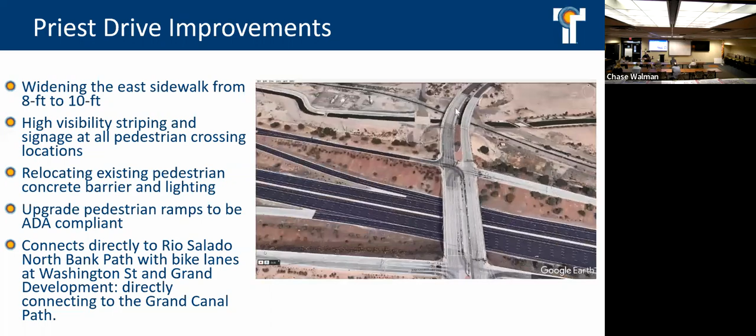On the east, where the current east sidewalk is, we're proposing to widen that to 10 feet along the whole east side of Priest Drive, and that would continue all the way to Washington Street, which we're approaching here.

We would do so by relocating the Jersey barrier along the Priest Drive Bridge, and then narrowing some of the travel lanes along Priest Drive. We're also proposing ADA improvements for directional ramps, as well as high visibility crosswalks along those crossings of the 202 that have to be made.

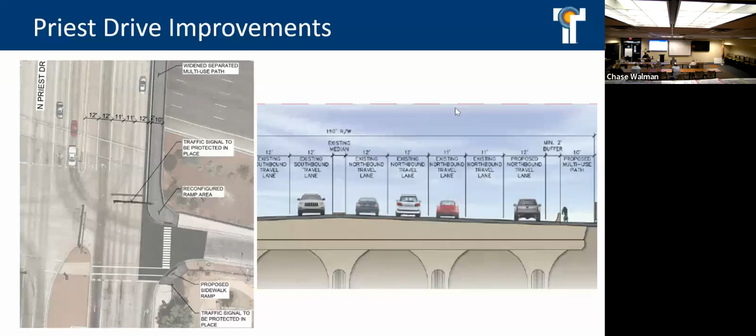Like a concrete barrier separating them. Yeah, I think it'll come up probably a little bit better in these photos. That thing, yeah. So this is the existing conditions here.

This is a rendering of what that would look like, basically just widening it so that it's a standard width, and then 8 feet.

Is that insufficient? Is 8 feet insufficient? You ride over it all the time, it's fine. Yeah, it's not the standard. The standard would be 10 feet for bidirectional travel.

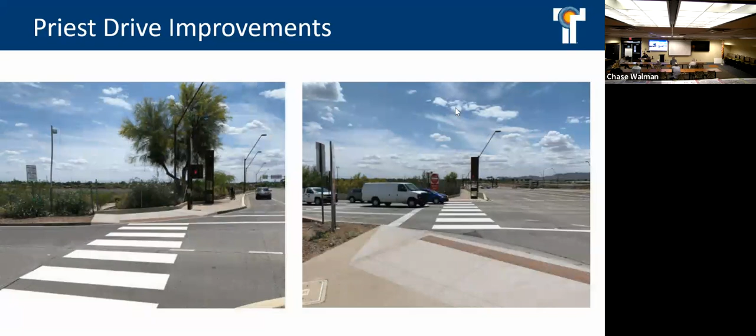So what we're proposing is that bidirectional travel would happen on the east sidewalk, trying to limit the amount of crossings that users have to make, keeping everyone on the east side instead of crossing between west and east. This is the area where the directional ramp improvements and the high visibility crosswalk are proposed.

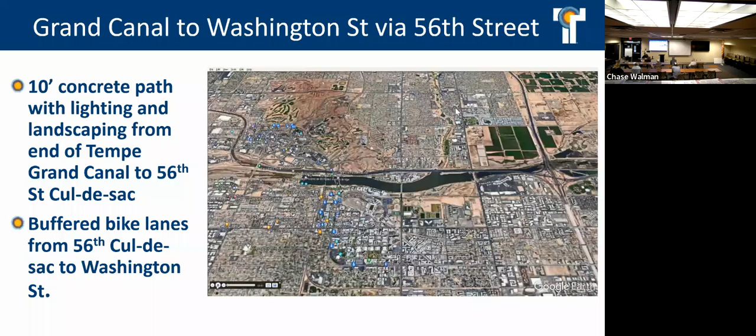This next one is the 56th Street connection, on the west end of Tempe's Grand Canal. I'll be zooming in this video over to the middle part of the existing Tempe Grand Canal, which is part of the Grand development that upgraded this path.

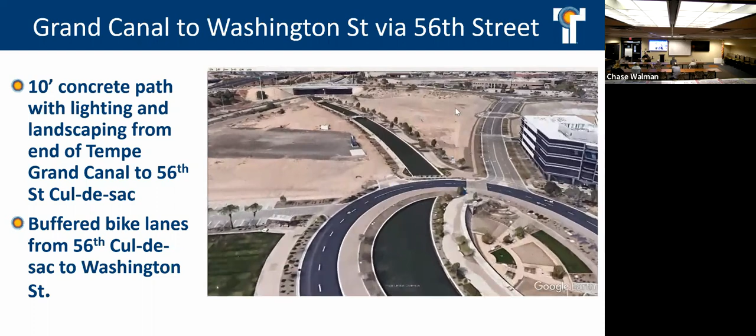We have a very small section of the Grand Canal in Tempe, so this video will fly over that existing section, part of the Grand development being built out right now. As we approach going west, that's the Priest Drive Bridge in the background. We're about to reach the end of where the existing Grand Canal path ends, where we would pick it up and continue west under the Priest Drive Bridge.

We'll continue with an off-street pathway. We're approaching Phoenix's Grand Canalscape here. This is the maintenance road I talked about before that would be in between the two paths.

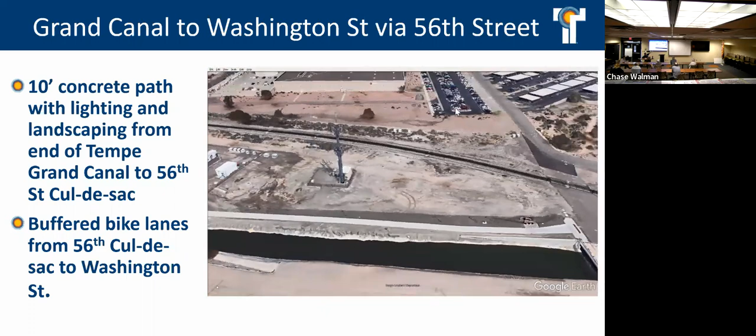As we continue north, we'll follow this old 56th Street alignment, proposing to go on the west side of the street until we get to the cul-de-sac area of existing 56th Street. From there, we'd propose pavement rehabilitation and restriping to accommodate buffered bike lanes along this section, connecting to existing bike lanes that continue north along 56th Street and east and west along Washington Street.

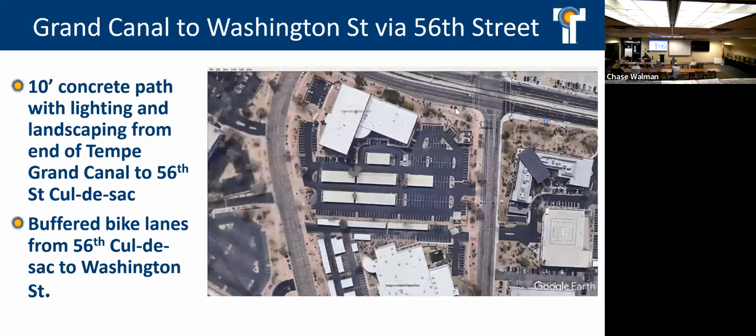I'm sorry, this is probably the most dizzying video. First time driving on Google Earth, but we'll get there eventually. There it is.

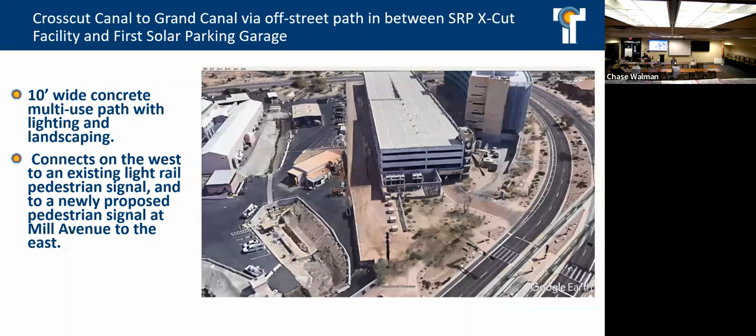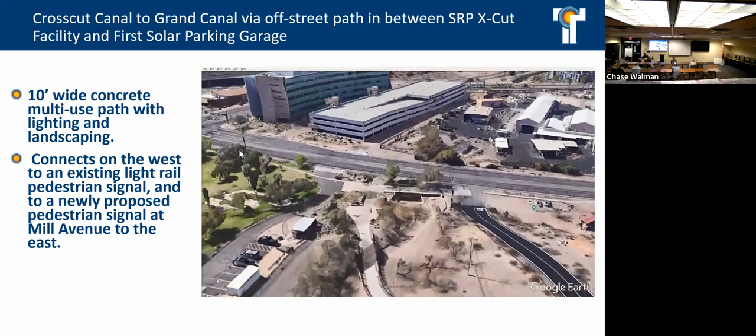Then we have this existing signal, and we would work our way in between the SRP crosscut facility and the First Solar parking garage building until we get to Mill Avenue, where we would propose a new pedestrian signal that would connect users to the existing Crosscut Canal connection, which continues into Scottsdale.

And red line, there it is, okay.

We're very preliminary, so we'll come back with 15% design so you can see real plan sheets with the proposed landscaping. We'll be proposing landscaping and lighting, and ADA directional ramps as well for the pedestrian signal here.

And then finally, we have the Lake View Drive improvements. This was on the east end of the project, near where we just were. This is proposing on-street as well as off-street improvements. Lake View Drive is kind of a horseshoe that connects on the west end to Washington Street and on the east end to Curry Road.

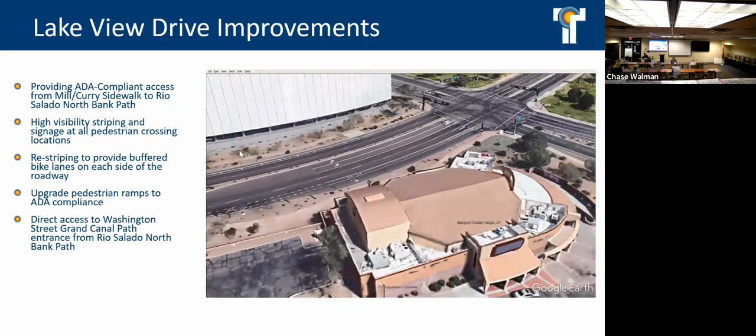There are existing bike lanes here today. We would propose buffered bike lanes for the sections where we could fit it. And then that's the entrance again to Tempe's Grand Canal. We continue and work our way over to the Mill Avenue sidewalk.

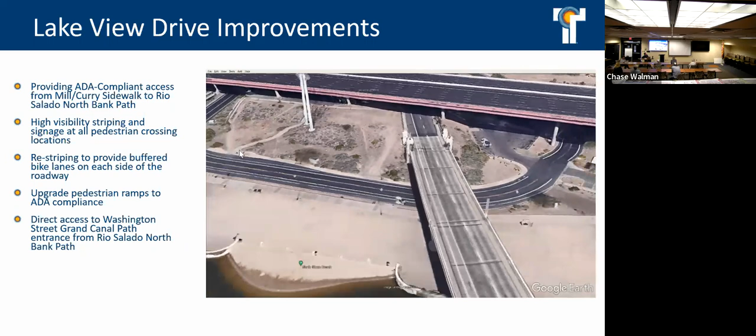As we go south, we have a missing gap in sidewalk between this Mill Avenue sidewalk and this area of Tempe Town Lake. That was something identified in our original public outreach in 2019 - there wasn't a good accessible route to get down from the Mill Avenue sidewalk to the Tempe Town Lake area and the Rio Salado North Bank path. So as part of this project, we propose to complete the gap in the sidewalk over to where this existing sidewalk is.

Currently there's a staircase here. We would propose a new accessible route to get down from that area up top down to the Town Lake area.

So those were our four connections. With that, our next steps - we went to our Transportation Commission, and we had a meeting at noon today. This is our second meeting. We'll have the public feedback open for two weeks, I believe, and Laura will go over that. But yeah, we're here today.

This is our conceptual stage, so we're going to get as much feedback as we can and then develop our 15% level designs. We'll come back in the spring to show that - there'll be a bit more update, you'll see more lighting and landscaping and some of the other elements we incorporate. With that schedule, we anticipate having the final plan specifications and estimates in the later part of 2023, and we would anticipate construction starting in summer of 2024.

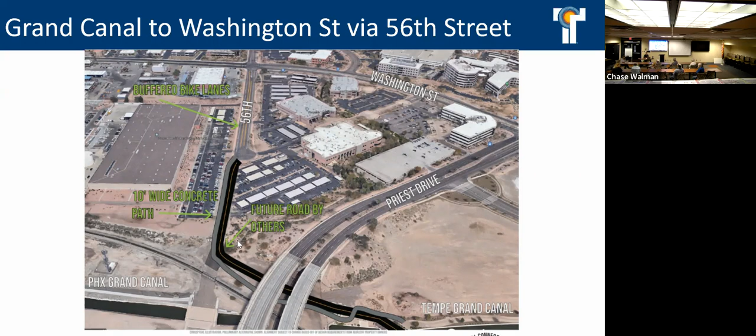Okay, so the other question I have is the crosscut canal path pedestrian crossing over Mill. Because I've held my breath several times when I've seen bicyclists fly down the crosscut canal path and just fly over Mill Avenue right there, making that crossing between traffic - not at the intersection, but right there.

Interesting - so are they going to hit a light to cross? Because I can't see these guys stopping when they fly down that pathway. Yeah, that's what we're proposing here - it would be a pedestrian signal, pedestrian activated, like a push button.

Okay, I'm not kidding - I was there with the park officers one day, and we were both like this as we saw them fly through that pathway onto Mill, so okay. It's at least somewhat of a safety measure, but whether they use it or not will be interesting.

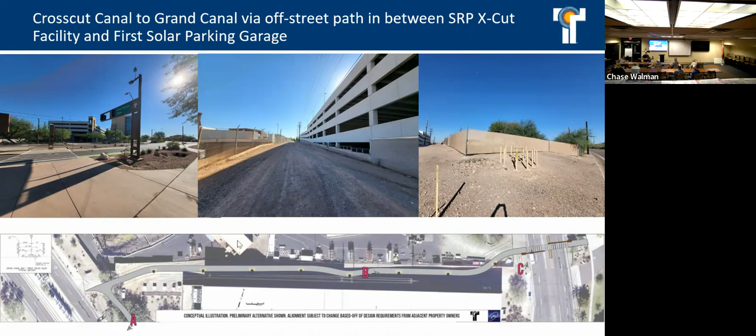Since we're right there, has anybody reached out to ASU Rowing? I know they use the drainage to carry their shells down, and that's pretty steep. I don't know that I'd want to try using a switchback carrying a shell, but hopefully we'll capture some of that feedback. We're talking to our special events staff, since there's a lot of considerations this area is used for, like the marathons and other special events, so we need to coordinate with them. We haven't done so yet. That'd be another good one to reach out to. We'll add that to the list to get feedback on.

That's a good idea. And on moving the Jersey barrier over the 202, I recommended we use up more space if we could - take another foot away from each of the left turn lanes if ADOT's amenable to that. 12 feet is certainly nicer than 10 feet with bidirectional traffic. If we're going through the cost of moving that, which is not small, an extra foot or two would make a nicer system for bicyclists.

I have a feeling we'll probably get some renewed direction from ADOT because of different staff there now. This is what they approved originally in 2018, but we'll have to do this process again once we have the design. We'll definitely go for as much as we can get, but they'll be the ones ultimately deciding.

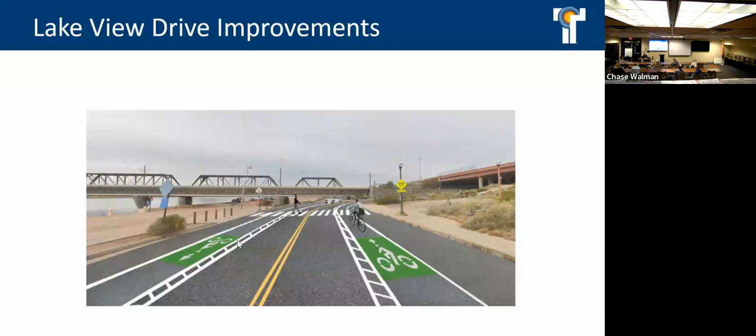I guess I'm still not understanding the point of widening that sidewalk. If we ride down through the zoo, come down Priest, cross over 202, we're on the west side of Priest - you're not saying we have to come over to the east side of the street to get on the bridge, are you? I'm not saying that. You can still ride on that west sidewalk, but we want to encourage, we'll have wayfinding signage, so we'll be encouraging use of the east sidewalk to make that connection.

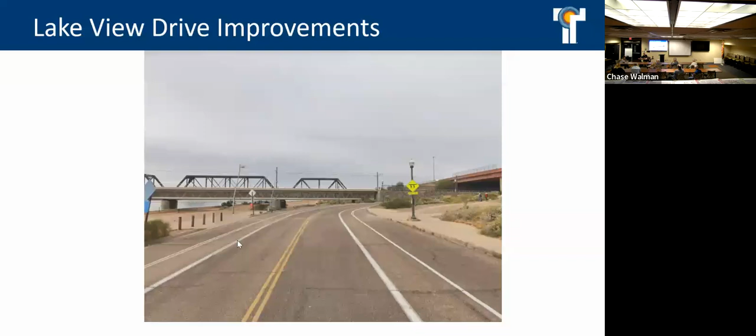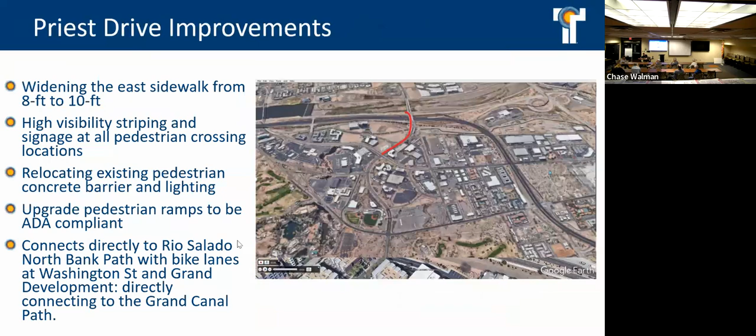It connects on the North Bank path much better because the North Bank ends at Priest. So if I wanted to go from the north side of the river up to Galvin Parkway or Papago Park, I can see that. Coming south, perhaps coming off the Grand, eastbound down to Town Lake, instead of going all the way over to the Lake View connection, I could connect down to the North Bank that way.

And I think the design recommendations for bidirectional is a minimum of 10 feet. So once you mention bidirectional, it's okay, well, it has to be at least 10 feet.

Right, I think this is the portion they're talking about. Chase, I apologize, I think I probably missed your intro when you were talking about that segment. No worries. That is actually my bike route into Phoenix twice a week, and I hold my breath when I cross on the existing sidewalk and cross the traffic entering the on-ramp. And when I go a few hundred feet further, I cross the traffic coming off the off-ramp. I hold my breath at those two places.

And I get, like you said, that's probably an ADOT decision, right? That's ADOT jurisdiction, how that's configured. But one thing I notice now about the positioning of the curb ramp on the southernmost crossing for cars going onto the on-ramp is, if I'm going northbound, I have to turn my wheels considerably to the right to hit the ramp to go across.

And when I turn my wheels to the right, some cars - I've not been hit, I've not even had a close call, but I can see it confuses them. They think I'm making a right turn. Now, why I would do that on an on-ramp, I don't know, but it looks like I'm turning right and not proceeding straight across. So if they can straighten out that crossing so northbound cyclists don't have to turn and make it look like they're turning right, that would be a visual cue to the drivers entering the on-ramp that they would have a little bit better idea of what we were doing.

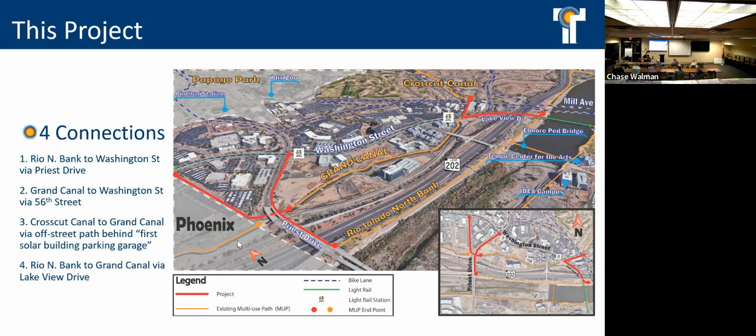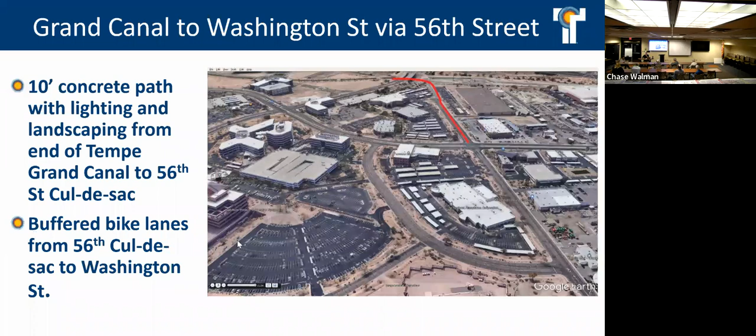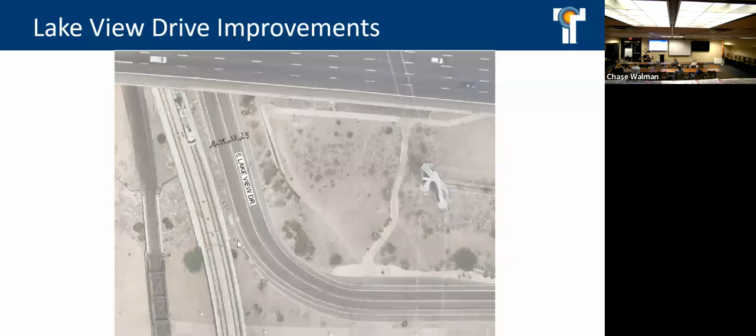Yeah, unfortunately not with this project. It's very tight in there and we have a lot of grade challenges. That's something that we explored in 2018, adding that sidewalk. So the existing condition today with just the street, then adding the accessible route, would not be in the scope of this project. I'm trying to get to it so you can kind of see the grade issues we're having, but it's too tight, unfortunately, to add that sidewalk. It's kind of grayed out. So yeah, unfortunately, it would not be in the scope of this project.

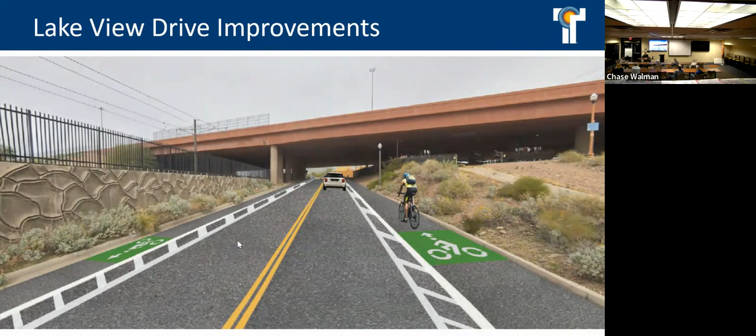Thanks for your question. Anybody else, Kim?

Well, and that's a good point, not so much on the west portion of Lake View Drive, because I think you've got a little bit of a sidewalk there with the switchbacks. But on the east side, I know from hiking in the area and working, picking up trash and that type of thing, you do end up walking in the bike lanes all the time. So that would be a definite consideration sometime in the future.

And I don't know, what I'm a little bit worried about, because I know street racing goes along on Lake View Drive - not necessarily that you're gonna get much in the way of bicyclists or runners. From 9 to 2, I think is what the police officers have told me, they've had the biggest problem in that area. But I'm wondering if that's gonna impact any of this. Maybe the construction will get them to stop for a while and find someplace else. But I know that's an issue right there on Lake View.

Yeah, that's something we'll talk more with our city traffic engineer as well. She had mentioned that. So that's something that we're gonna look to see what we can accomplish as part of this project, to maybe introduce some traffic calming or something that would deter it somehow. They've been moving the ones that they put in right now, so. Yeah, and we have other things like special events that we need to consider as well. There's a lot of uses for this Lake View Drive, so we'll get into it and see what can be done with that.